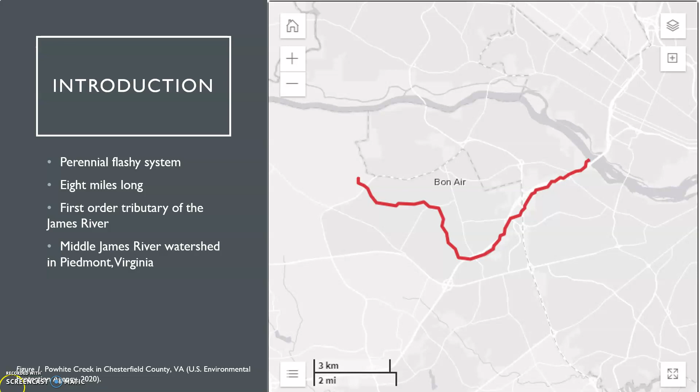Chesterfield County was formerly known for its granite quarries and mill ponds, which were highly sought-after industries by blue-collar workers in the post-settlement era. However, these industries eventually led to the accumulation of legacy sediment, which buried natural floodplains. The region surrounding the mouth of Powhite Creek was formerly the unincorporated town known as Granite after these industries.

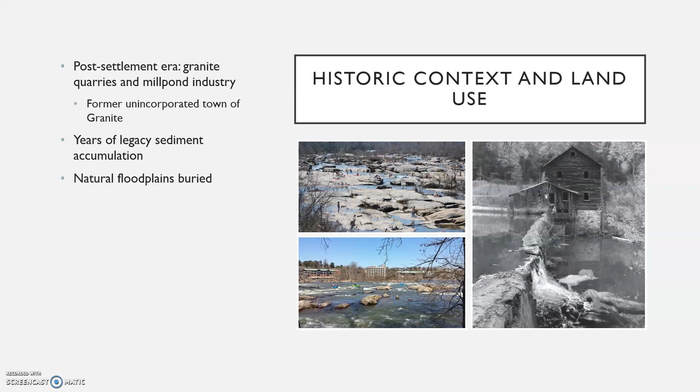However, as we will discuss, the removal of Petersburg granite seen in the two leftmost pictures on the James River changed the landscape forever. Evidence of these activities can be seen in the many gullies surrounding Powhite Creek, which suggest a historic landform that has been altered due to the presence of legacy sediment.

The watershed response in a stream which was formerly known for its granite outcrops similar to those of the James is a channel comprised of fine-grained alluvium, a pool-riffle-type planform, and evidence of severe bank instability and erosion, in which the primary sediment supply source is the stream banks.

An initial site visit resulted in the following pictures as well as the observations that highly depositional features were apparent on the stream as well as little to no aquatic life.

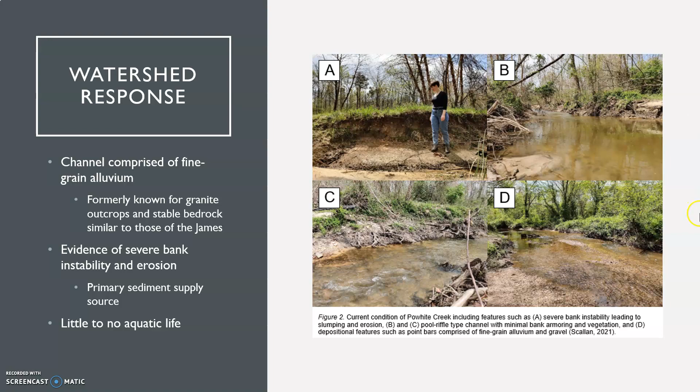Returning to the modern era, as of 2000, the landscape surrounding Powhite Creek was approximately 90% urban land use, and in 2008, the Virginia Department of Environmental Quality determined that from its headwaters to its mouth at the James River, Powhite Creek is considered not supporting of the aquatic life use goal due to impairment of the benthic community.

This means that the water quality indicator species determined by the EPT index are severely underrepresented with very limited biodiversity across all conducted assessments. To this day, Powhite Creek is listed on the Virginia 303(d) list of impaired waters under Category 5 for waters impaired or threatened by pollutants for one or more designated uses and requiring a total maximum daily load study.

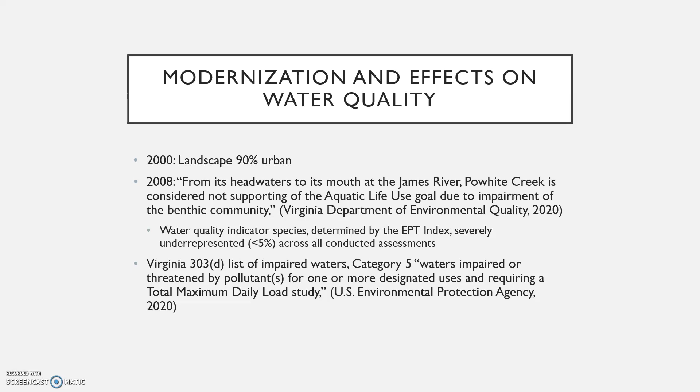These disturbances are driven by the process of urbanization, in which stormwater runoff with sediment as a vector carries chemicals, nutrients, and bacteria from human activity directly to the channel.

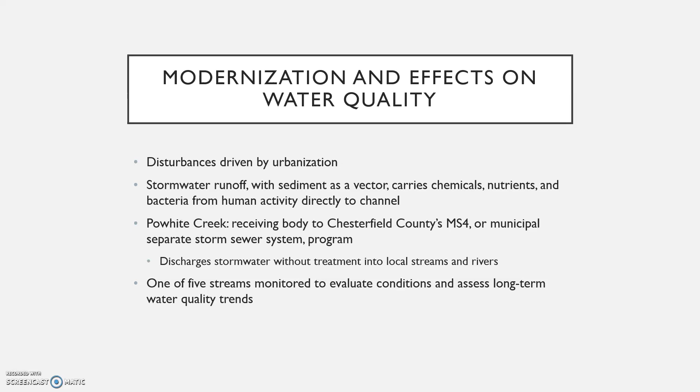An additional effect of urbanization involves the inclusion of Powhite Creek as a receiving body to Chesterfield County's MS4 program, which discharges stormwater without treatment into local streams and rivers, and as a result, Powhite is now one of 5 streams monitored to evaluate conditions and assess long-term water quality trends as they may be related to this system.

These monitoring reports include the following in-stream chemistry analyses for the years 2015 to 2020, in which the average total nitrogen is 0.8 milligrams per liter and the average total phosphorus is 0.1 milligrams per liter.

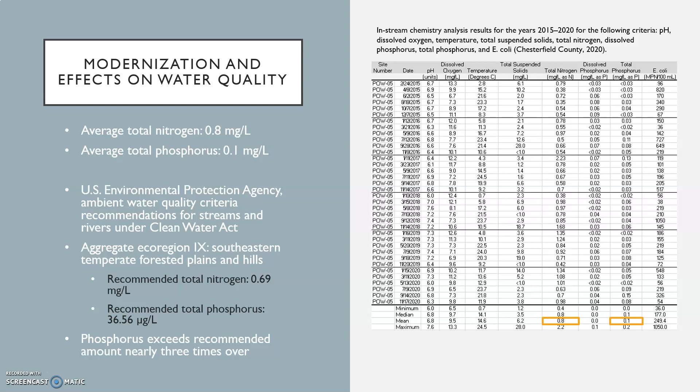Further research indicated that the U.S. Environmental Protection Agency developed ambient water quality criteria recommendations for streams and rivers under the Clean Water Act. For the aggregate ecoregion 9, which includes the Piedmont region of Virginia, the recommended total nitrogen limit was 0.69 milligrams per liter, and the recommended total phosphorus limit was 36.56 micrograms per liter. The conclusion is that the phosphorus amount exceeds the recommended amount nearly 3 times over for Powhite Creek.

These reports also included bioassessments for benthic macroinvertebrates using the Virginia Stream Condition Index, which is a state-regulated water quality metric. Based on species richness and habitat score, these determined that severe environmental stress resulted in the stream being only partially supportive of the benthic community.

In summation, the state of Powhite Creek is likely the result of extensive legacy sediment accumulation leading to downcutting and bank instability, and exacerbated by increased stream flow and nutrient input from current MS4 stormwater management practices.

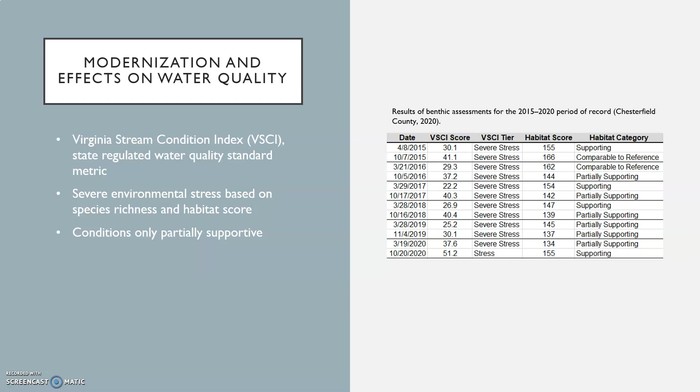The current restoration approach is dictated by the MS4 program permit, which enforces minimum control measures, including public education and outreach, public involvement and participation, illicit discharge detection and elimination, construction site runoff, post-construction stormwater management, and pollution prevention and good housekeeping for municipal operations.

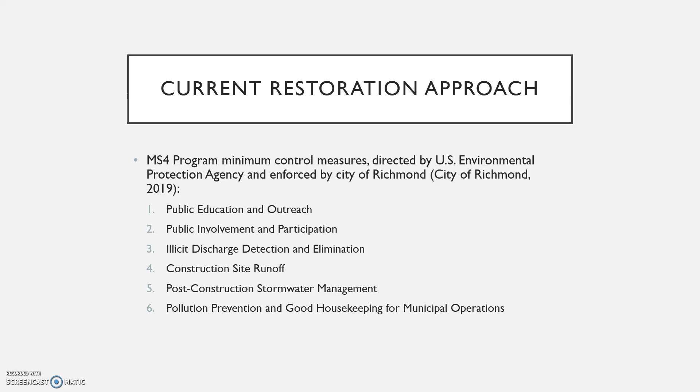In conjunction with this outline, we recommend a direct approach to stream restoration through the implementation of a channel design which complements source reductions and land-based best management practices by reconnecting the stream to its floodplain. It's important to recognize that in streams, up to 90% of transported phosphorus is attached to sediment, making erosion control one of the most important mitigation strategies against nutrient loading.

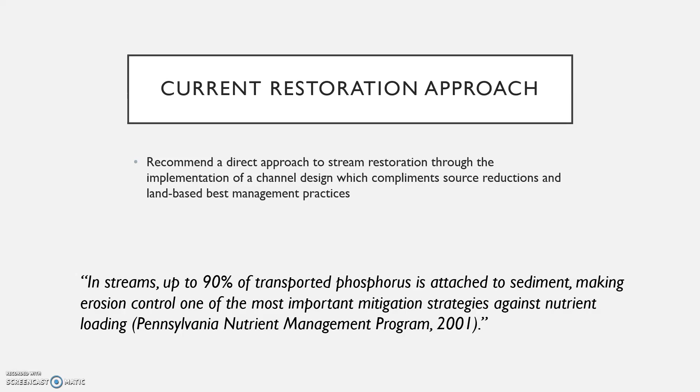Considering stream monitoring reports and current conditions of Powhite Creek, we believe that this should be the primary strategy to stream restoration. The inserted map includes the 0.5-mile restoration site of interest for Powhite Creek, in which the major site constraints for this area include a highway bordering the left bank of the stream, which will limit site design approach to channel slope, as well as residential areas to the south and east, as well as a recreational area that is often used for mountain biking and trail hiking along the creek.

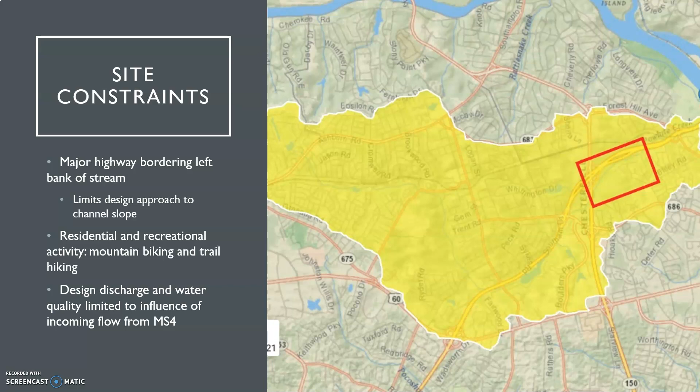The design discharge and water quality will also be limited to the influence of the incoming flow from the MS4 system, and therefore will also limit the design of the stream.

Even so, there are many parties with a vested interest in the restoration of Powhite Creek, including Chesterfield County and the City of Richmond, MS4 program affiliates, and local residents frequenting Powhite Park and the surrounding area, whether they be for financial, regulatory, or aesthetic and recreational purposes.

Overall, the objective of this assessment is to determine the channel design that will stabilize the stream banks while maintaining sediment transport such that the aquatic life use goal of the benthic community is supported for Powhite Creek through sediment and nutrient loading remediation. To accomplish this goal, we recommend a multi-stage channel design including the bankful channel and floodplain benches with an inner berm.

This design, according to the Iowa Department of Natural Resources, is designed to accommodate a range of flows while maintaining sediment transport capacity, providing flood conveyance, reducing shear stress along the banks, and allowing vegetation to establish, as well as offering nutrient filtration through lateral floodplain connection.

The bankful bench should transport the 1 to 2 year flood events, or bankful flow, before flooding occurs and without channel aggradation or degradation. To accomplish this, we must calculate the appropriate size and shape of the bankful channel accurately. We also note that currently there is no stream gauge data available for Powhite Creek. Therefore, the natural channel design approach using the reference reach method was used.

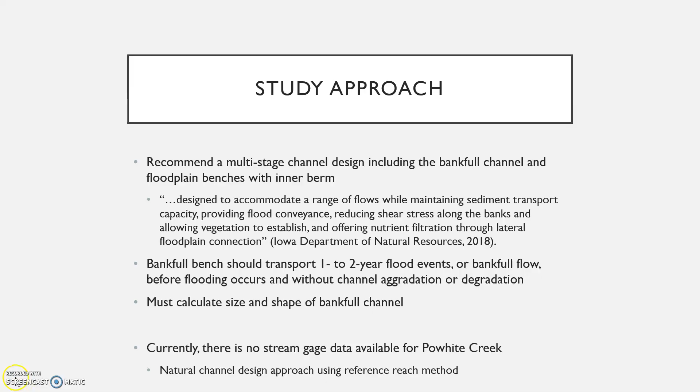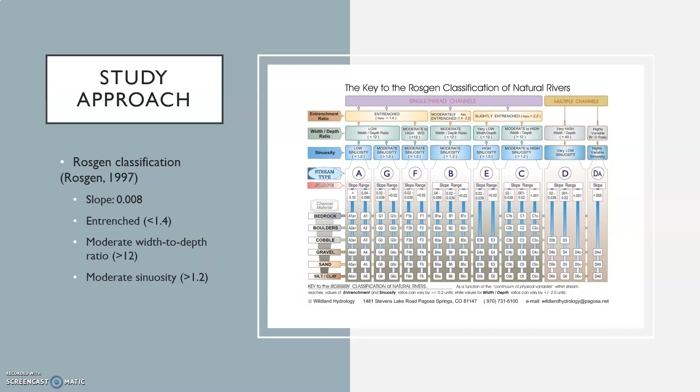To choose an appropriate reference reach, we use the Rosgen classification system to assess the current stream type of Powhite Creek. Using the StreamStats elevation profile tool, a slope of 0.008 was estimated, with a moderate width to depth ratio, moderate sinuosity, and because of the current planform, an entrenched stream. A Wolman pebble count was conducted, in which the D50 or median grain size of the stream was assessed and determined to be approximately 16 millimeters.

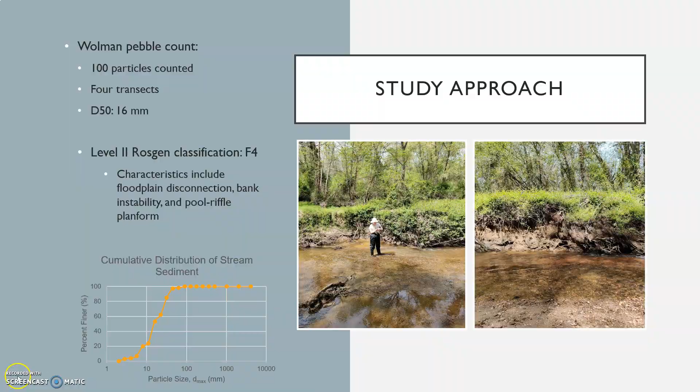This concluded a Rosgen classification of F4 with characteristics including floodplain disconnection, bank instability, and pool riffle planform, which is consistent with the observations noted at the site. To estimate bankful characteristics, we use regional curves for the Virginia Piedmont region, which assess bankful measurements according to the drainage area of a specific geographical region.

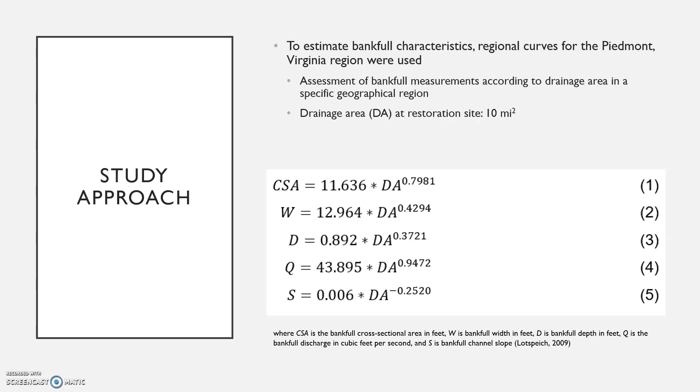For our site of interest, the drainage area was approximately 10 square miles and was determined appropriate because the stream HUC is included within the Piedmont location and the drainage basin area is less than 250 square miles, meaning the restoration site and regional curve references were consistent.

Looking to our reference reach, Stroubles Creek was listed for similar impairments due to similar environmental stressors and was restored using a two-stage channel design, allowing for the annual inundation of the lower bench by bankful flows and a high bench accessible to the 2.5-year recurrence interval floods.

Because of Powhite Creek's floodplain disconnection, we recommend the restoration of Powhite from an F4 to a C4 system using native materials and multiple stages that encourage floodplain connectivity. We also want to note that because of the geographic difference between Stroubles Creek and Powhite Creek, this design is only used as a guide and is not used directly for stream restoration.

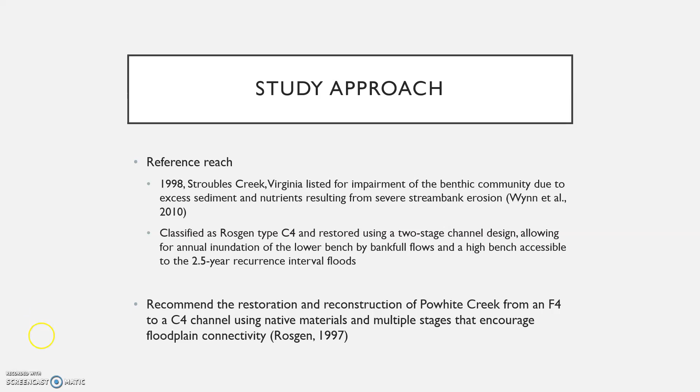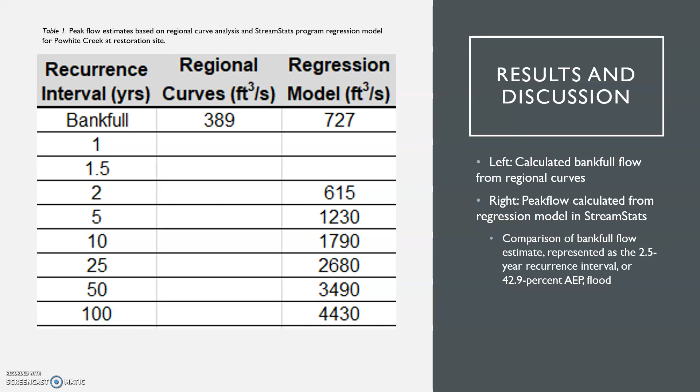The results of our regional curve analysis for bankful flow resulted in a value of approximately 389 cubic feet per second. In addition, a regression model using the StreamStats watershed delineation tool was used for comparison of peak flow, in which the 42.9% AEP flood was determined as approximately 727 cubic feet per second. This highlights the statistical error in the estimation of bankful flow, and for consistency's sake, we continue with the regional curve analysis for all bankful conditions.

The remaining regional curve analyses are included in the inserted table and compared to our reference reach site of Stroubles Creek. A Manning's n of 0.04, side slope geometry of 2:1 for a trapezoidal channel, and a critical Shields value of 0.045 were also determined for Powhite Creek and determined acceptable based on both Stroubles Creek and the Rosgen C4 stream type classification. The application of the BSTEM model also verified the effectiveness of streambank stability for all calculated parameters.

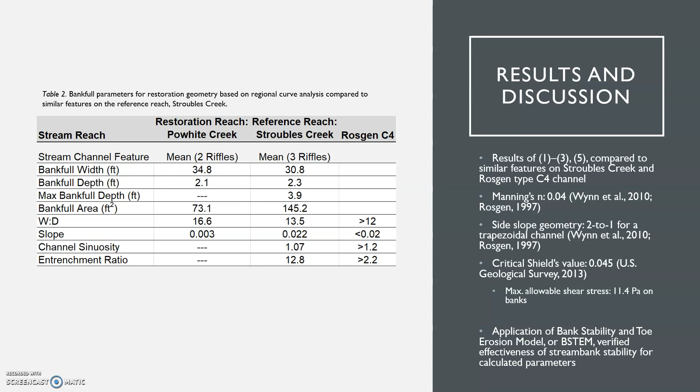Following the partial removal of legacy sediment, a final bankful channel of approximately 2.1 feet in depth, 34.8 feet in width, and with 2:1 side slope ratios will maintain the riffles of Powhite Creek. This bankful flow should reach the lower bench without imposing erosional forces on the banks, and the lower bench will be reestablished with native herbaceous vegetation and grasses, and the higher bench with native shrubs and woody plantings to reinforce nutrient filtration and stability.

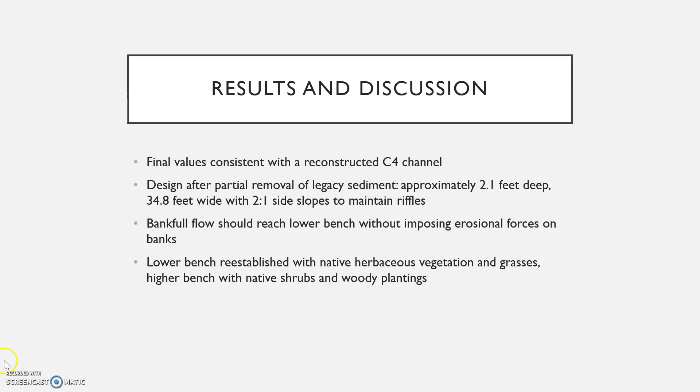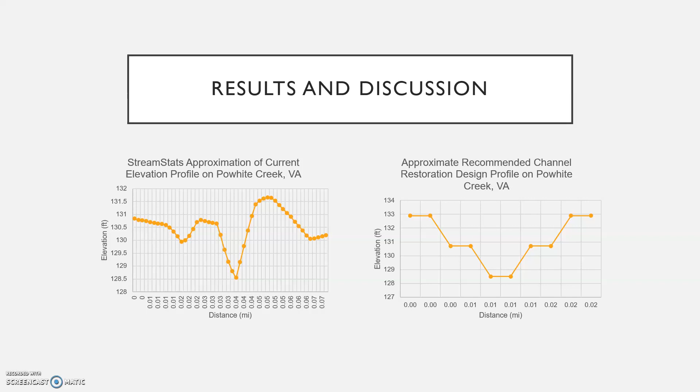The inserted table on the left is an approximation of the current profile of Powhite Creek using the StreamStats elevation profile tool compared to the table on the right, which is an approximation of the stream profile according to the recommended restoration design. We recognize here that the proposed restoration design includes reducing the channel slope to 0.003 for a stable bankful flow. This design may or may not be possible in its entirety given the site constraints of an urban setting.

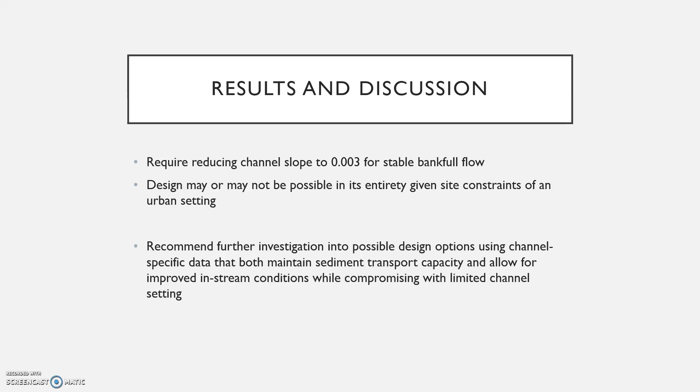In this case, we recommend further investigation into possible design options using channel-specific data that both maintain sediment transport capacity and allow for improved in-stream conditions while also compromising with limited channel settings.

In conclusion, based on regional curve data for the Piedmont, Virginia region, reconstruction of Powhite Creek from an F4 to a C4 stream with a main channel width of 34.8 feet, a depth of 2.1 feet, and a decreased slope of 0.003 may allow for bankful flow that inundates the inset floodplain annually without exceeding bank critical shear stress.

Here we include that future analyses should include a bedload transport model to ensure minimal movement of the 84th percentile grain size. We also recommend an integrated solution including the application of watershed-scale stormwater best management practices through the County MS4 program as recommended previously. Post-project monitoring should also take place for at least 3 years to assess bank stability and sediment transport, as well as in-stream chemistry and species abundance analyses to determine the effectiveness of stream restoration.